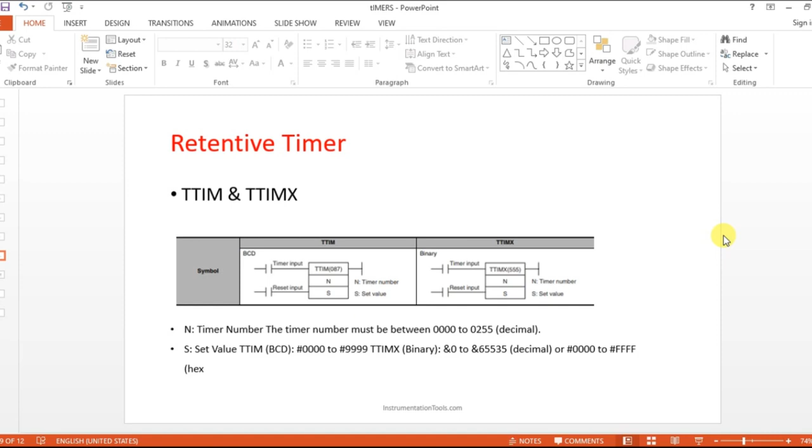In this session, we are going to see about retentive timers.

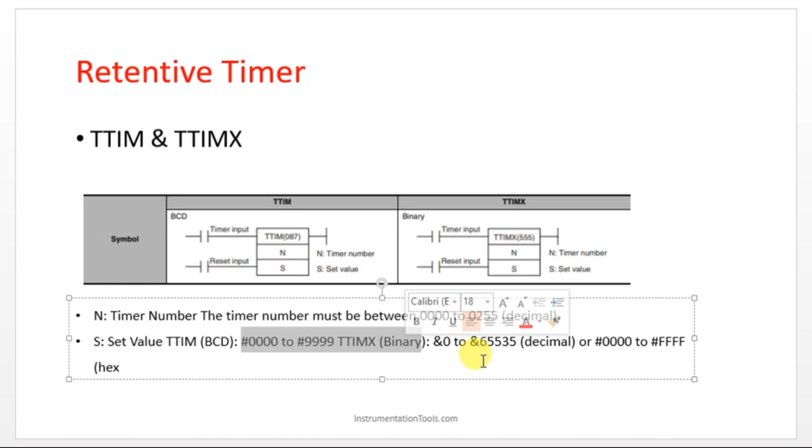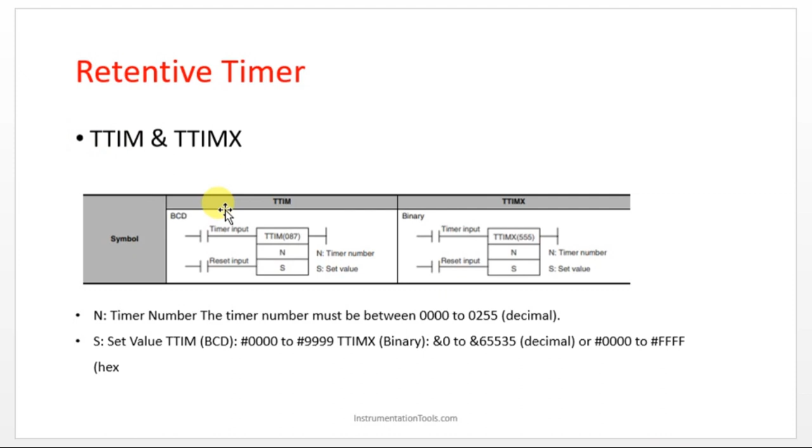Okay, so without any time delay we'll go to the CX Programmer and see how to work with these two timers, TTIM and TTIMX. Let's open a sample example. So I have here TTIM. This is called a totalizing timer. Retentive timers are called totalizing timers here.

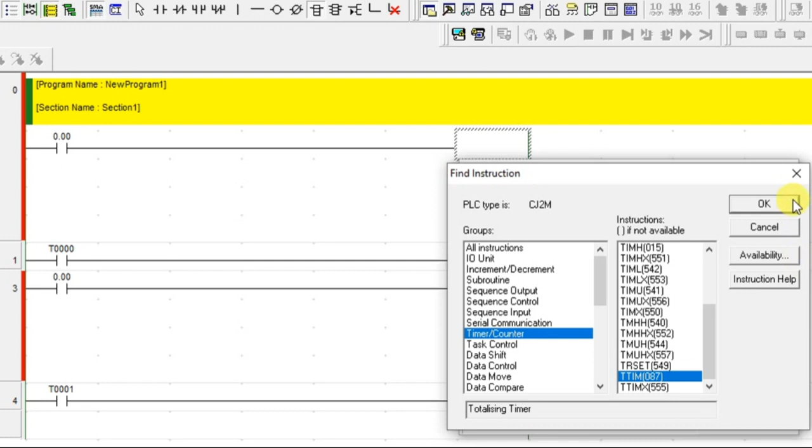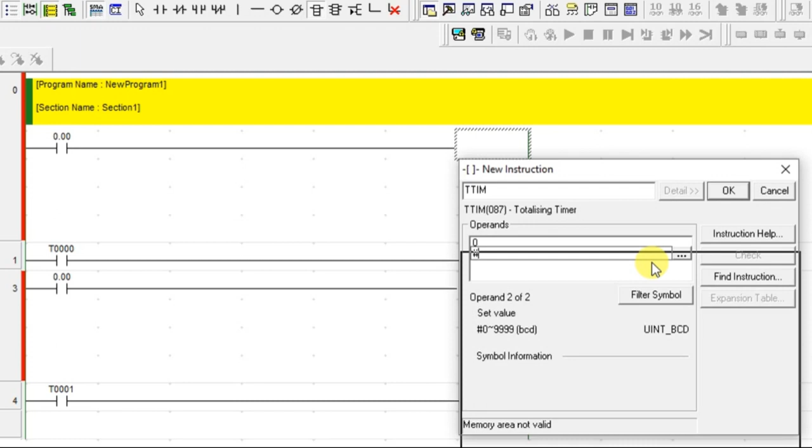So click OK and give the timer number here, 0. And here you can give the set value directly, or you can click OK and edit it there also. So I'm just giving 100. Once you click on this, you are getting

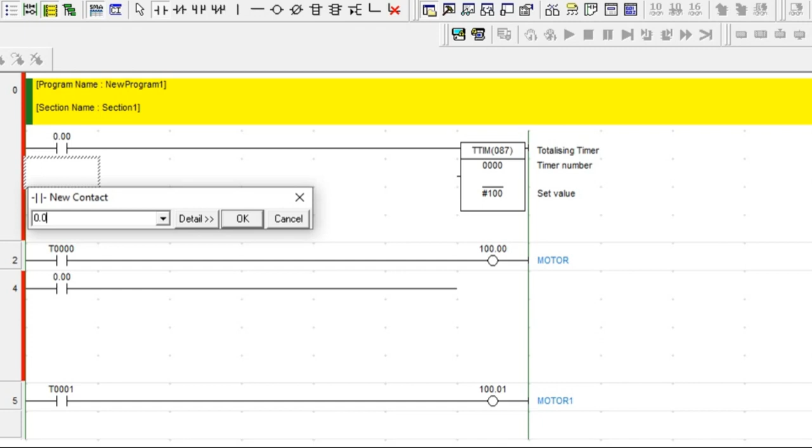one more input here. All retentive timers have a reset option. A timer has two inputs: one is for turning on the timer and another is for resetting the timer. So I'll just add one more input here to reset the timer, 0.01. All retentive timers will have a reset option.

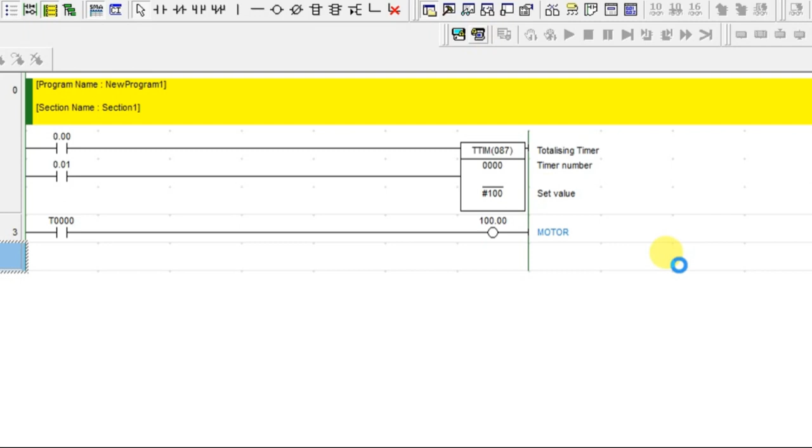So I'll edit this. Alright, let's go online and check this BCD type first, then we will go for the binary type. So let's turn on this. After 10 seconds, your output is on.

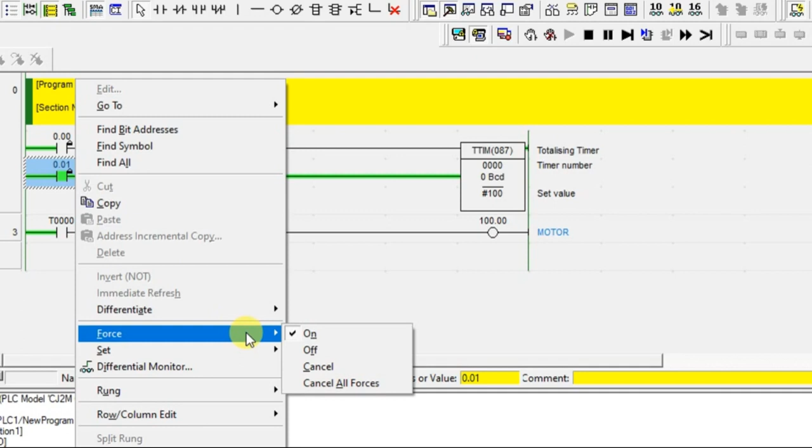This totalizing timer counts from a low value to a higher value. I'll tell you why. See, even if you turn off the timer input, your output is not turning off. That is a feature of the totalizing timer. So you have to use the reset option to turn it off. Once you turn on the reset input, your value goes to 0 and your motor is also off. That's the working of the retentive timer in Omron.

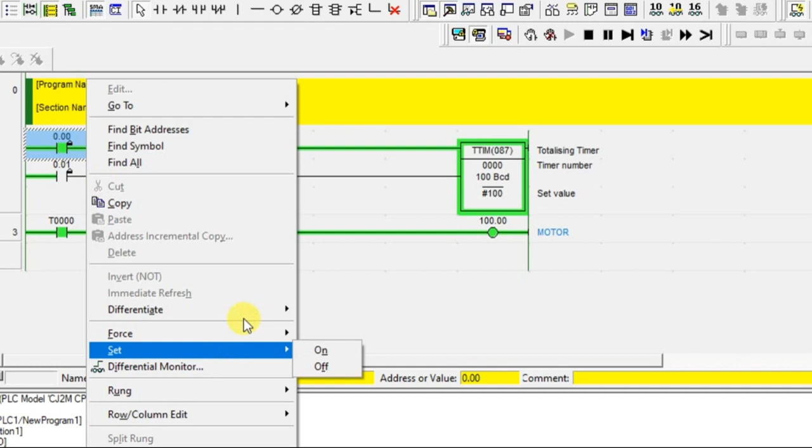I'll repeat again. I'm going to turn on this. After a time delay, your output is on. Now you are turning off your input. In the previous session, we saw the types of timers. In those timers, if you turn off the input, your output will also go off. But the retentive totalizing timer in CX Programmer will not work the same. You have to use one more input to reset it.

It is like a set. Once the timer is turned on, it is like a set coil, and after that obviously you have to use the reset option to reset the timer and also your output. So I'm going to turn on this to reset. That's it, we have done the reset.

One more thing. Let it be running; we'll turn it off in between. It started increasing, and I'm turning it off in between. Look at this, what is happening? Your value is retained. Previously, it would go back to the original value. Now, where it stopped, it is retained there.

Let's turn on again. It started running from the place where it left. Correct? So it is retaining the value; that's why it is called a retentive timer.

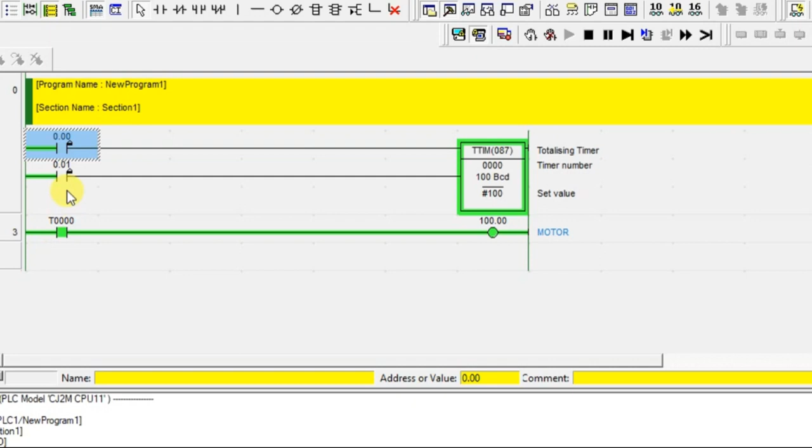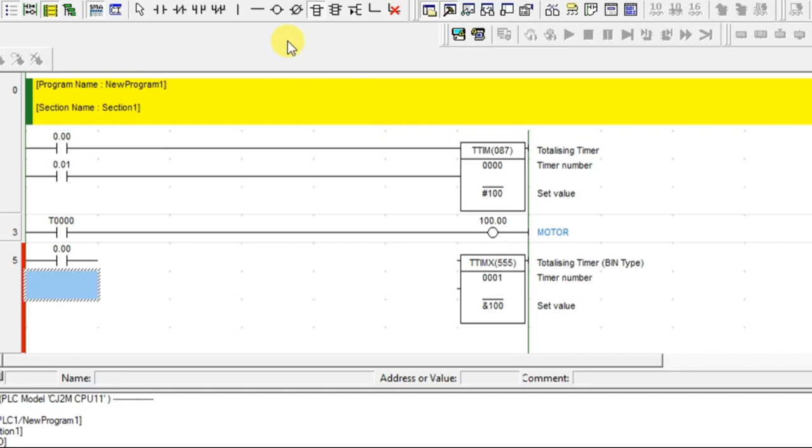So let's add the binary type also. 0.00, TTIMX timer 1, and I'm giving the same value as that. That's it. This also has two legs, so I'm adding the same reset input and connecting it. And we will have one more input to turn on an output.

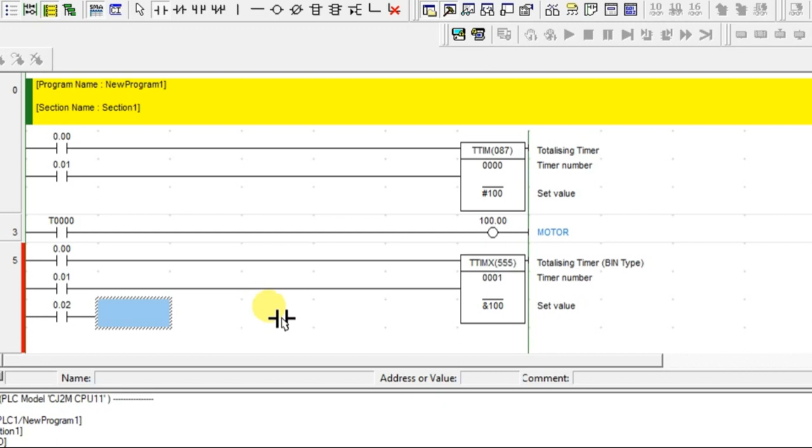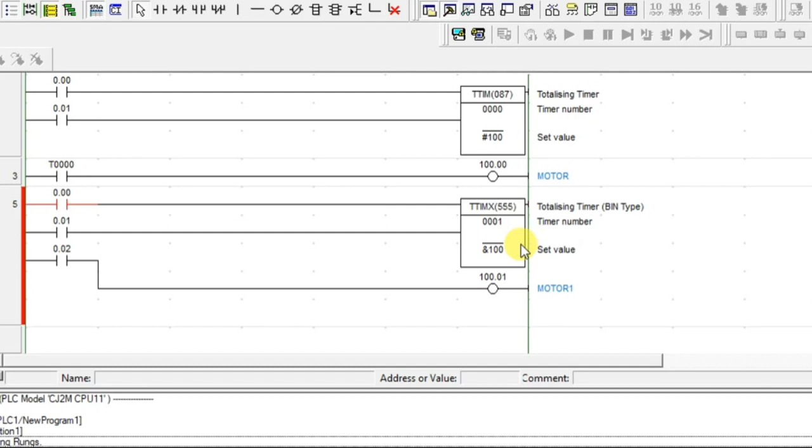So it's connected. Let's compile this. We have an error. What is this error? Look at this: overlapping rungs. If you are using a timer, it should be in one rung only. You cannot connect one more output along with it. This is at the 0th rung and the motor is at the next rung. This is at the second rung and this has to be in the next rung. So just cut and paste it in the next rung.

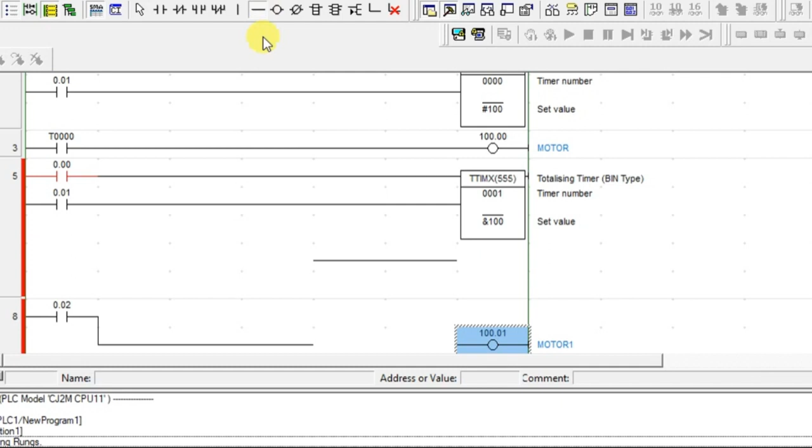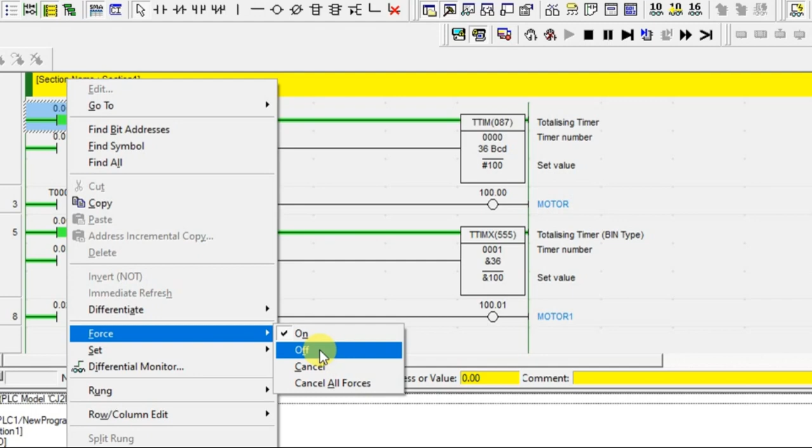That's it. Now we'll compile. There is no error, so go online. Turn on. Both timers started running. If you turn off in between, both are holding the value. And if you turn on again, they will start from there. Once the time delay is done, it will turn on a motor. The first timer turns on this motor and the second timer turns on the other motor.

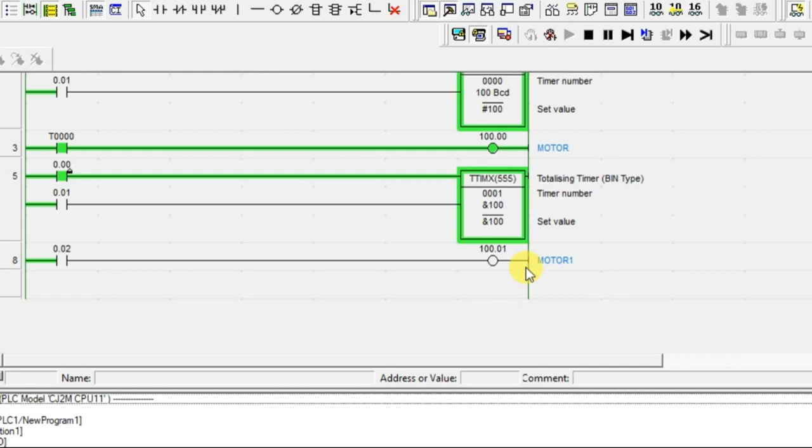See, this has not turned on. This output is not turned on because instead of using the timer number, I have used some other input. So if you turn on the reset, what will happen? Your timer is getting reset.

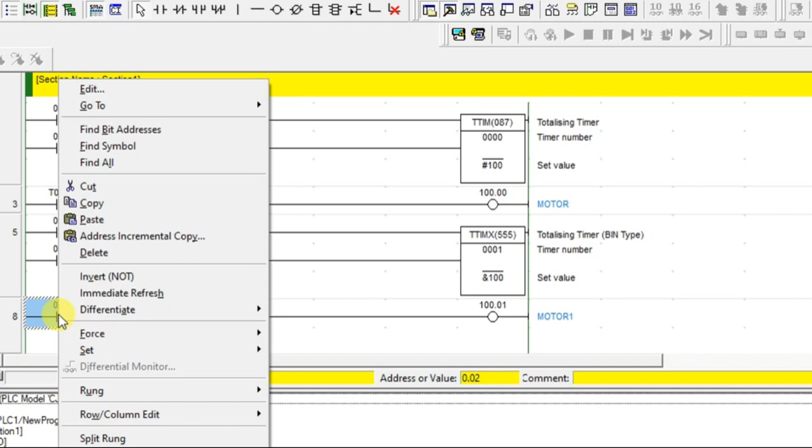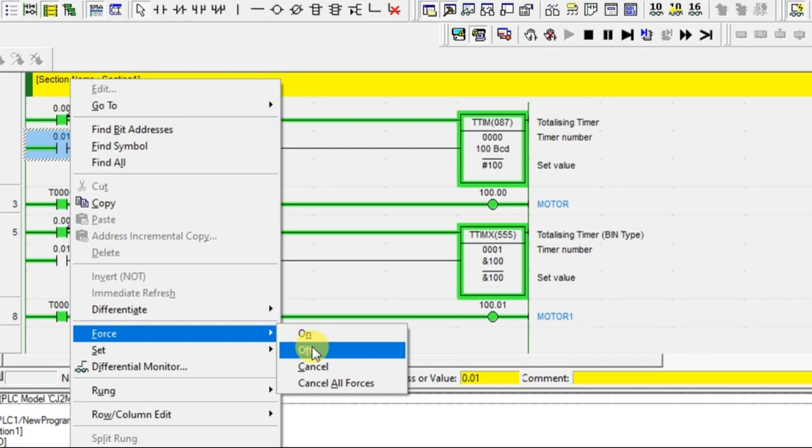So we'll edit this one. Let's run again. Turning on, both are running. After that, motor and motor 1 will both get turned on. See, it's turned on, and the input is on. If I reset, what will happen? It got reset. But once you turn the reset off, the timer will again get turned on because your input is still in the on condition.

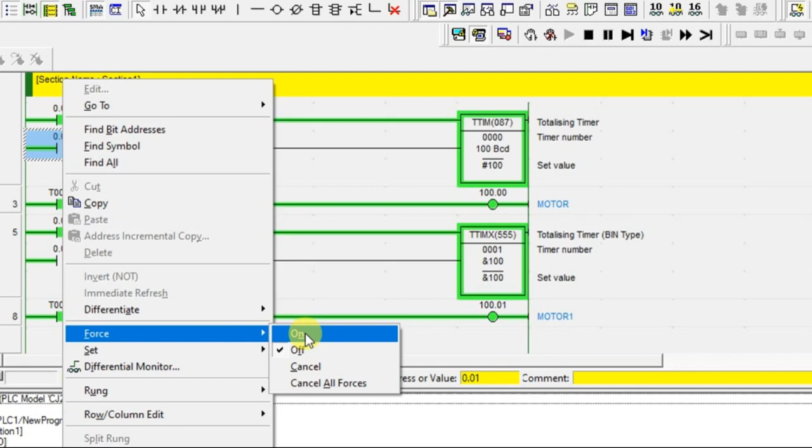I'll repeat again. Both outputs are on. Now before turning off the input, I'm going to reset. Now the reset bit is on, so your value goes back to the original starting value. Now turn off your reset. Since your input is in the on condition, the timer starts running again. So this is the working of retentive timers, and all retentive timers should have a reset input.